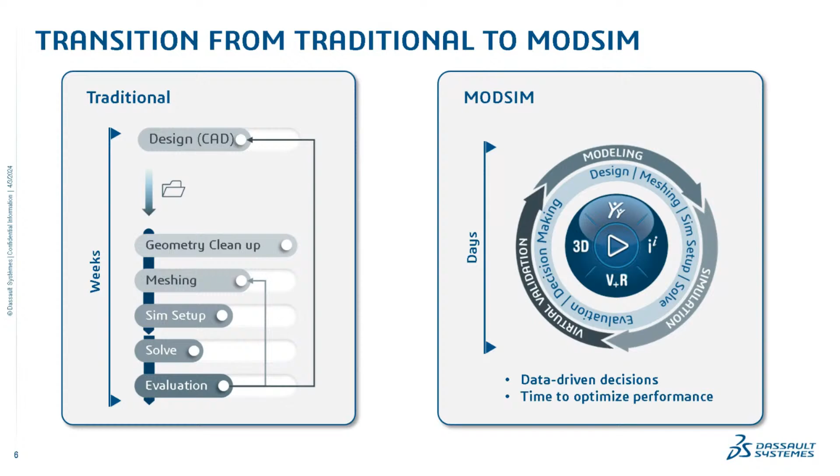With these capabilities, ModSim already offers a huge potential for time saving. Let's have a quick look at a very simple example to show you how this works in principle. The example refers to a frame of a fuselage structure. The designer has built a parametric CATIA model and a finite element mesh already exists.

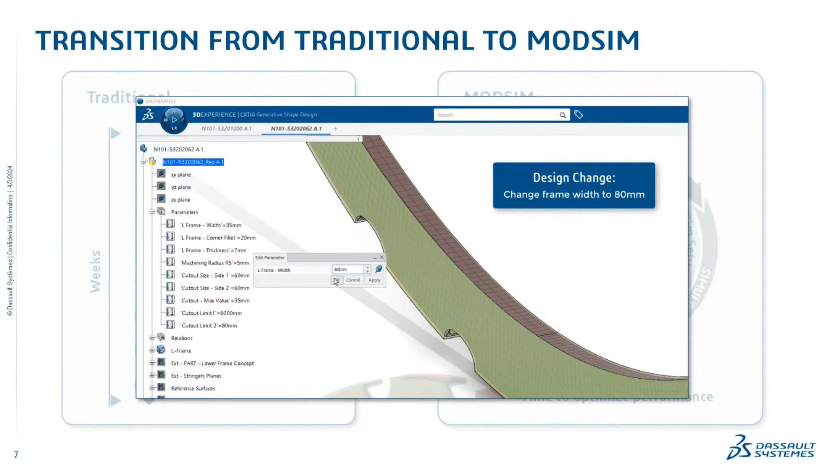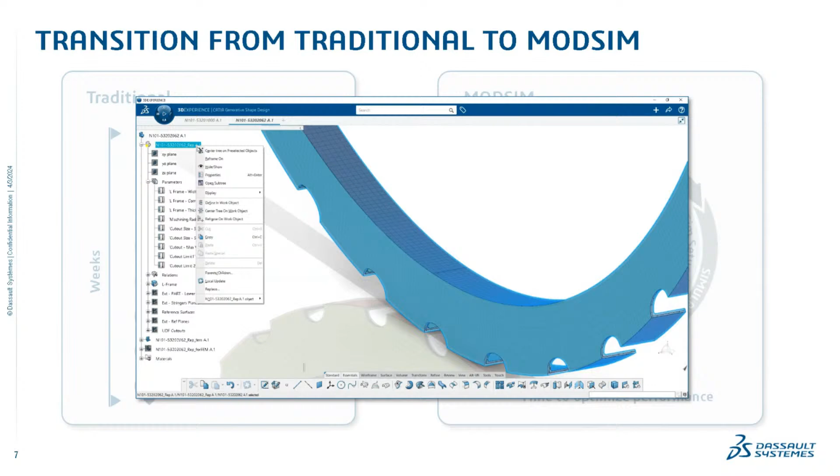Now on the design side, with the CATIA application, a design change is applied. To be more precise, the width of the flange is increased. Since the finite element model is fully associated with the CATIA model, the only thing you need to do to get the finite element model updated is push the global update button. Through such a global update, the finite element model will be automatically synchronized with the latest design data.

Of course, this is only a very simple example to show the principle. Real-world models with large, complex assemblies certainly pose a number of additional challenges. But since the focus of today's presentation is a bit different, I do not have time to talk about this aspect of ModSim in more depth.

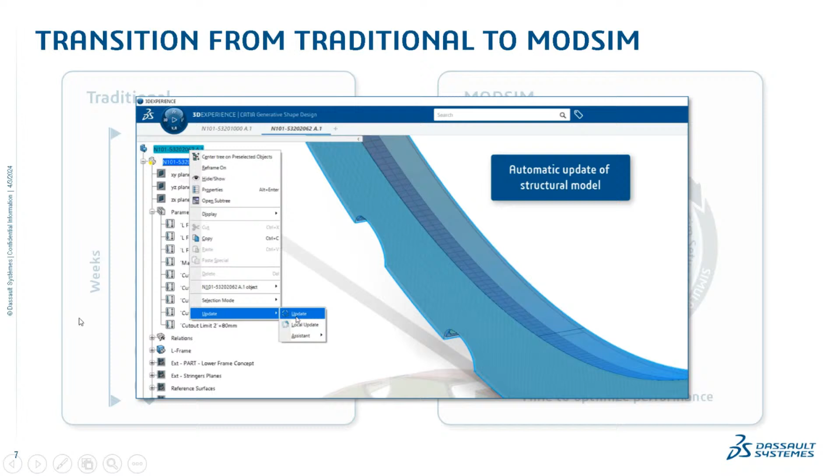However, what I would at least like to mention in this regard is that this capability to automatically synchronize simulation models with design changes is of particular interest in the context of optimization tasks or general design studies, whenever you're working on design exploration. Because we also provide a more or less complete set of both parametric and non-parametric optimization techniques on the 3D Experience platform, it is very efficient and straightforward to run such design and optimization studies based on these ModSim capabilities.

But what is more critical with regard to the topic of our presentation today are those aspects of ModSim that closely link the world of design and simulation to the entire product development process. This link is established through a number of data management processes, such as requirements management, change management, test management, and a few others.

Requirements management, for example, is important because it allows you to digitally capture those requirements coming from certification regulations. And talking about certification, usually you have to prove that an airframe structure complies with the certification requirements through test. Most of the time such tests are real physical tests, but they could also be virtual tests, meaning simulations. In any case, what is important is that the test data, whether it comes from virtual or real tests, is linked to the requirements the test is supposed to verify.

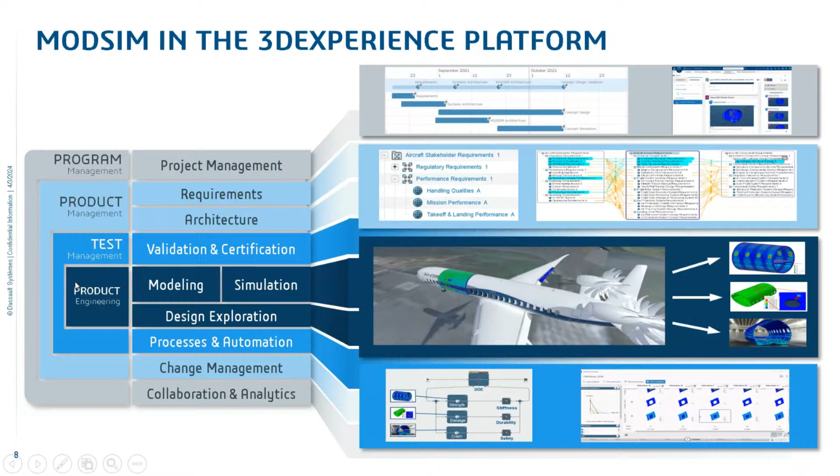This link between requirements and virtual or real test data, or in other words, the traceability from simulation data back to the certification context, can be achieved with the test management capability on the 3D Experience platform. Once we get to our example of cohesive joints, I will also show you how creating this link with test management actually looks like.

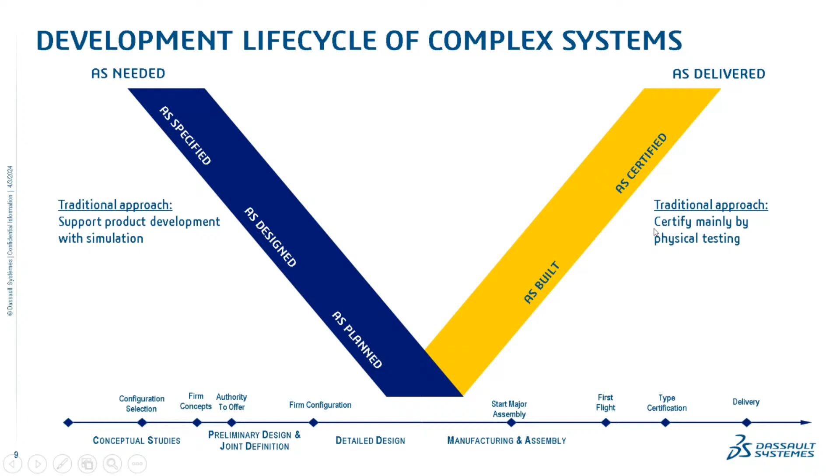In a classical development process, simulation is primarily used on the left-hand side of the V, in particular in the context of designing or optimizing the product, the aircraft for example. On the other hand, when looking at the right side of the V, the verification of certification requirements is predominantly provided through real physical tests that, of course, cause significant costs to the program. So the objective should be to increase the use of simulations and at the same time reduce the number of physical tests in the context of verifying certification requirements.

But of course, to do so, you have to build already fairly early in the program, prior to any certification activities, high confidence in both your simulation models and your simulation methodology. This means you have to work towards building simulation credibility, and you have to document how you do this.

Confidence in simulation models is achieved if you can prove at any time that the models were built with the right inputs. This requirement can be fulfilled through the close and direct link between design data and simulation models that we provide on the 3D Experience platform. I just showed a simple example of how this close link can look like, and thanks to this link, we know at any time to which design revision a certain simulation model belongs. So in this way, you can at least assure confidence in simulation models.

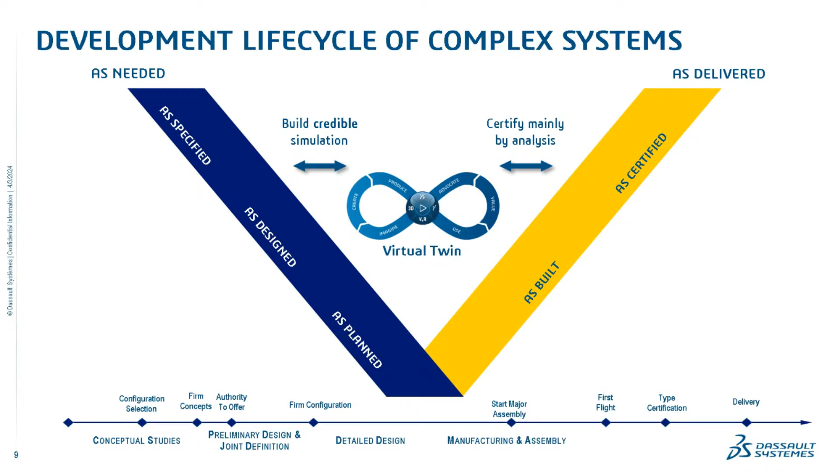Meaning what is left is still the question how we can assure that already during the design phase, the required confidence also in the accuracy of the simulation methodology is achieved. And in this context, I would like to refer to the respective standards on verification and validation that are issued by the ASME, the American Society of Mechanical Engineers. And by the way, also the EASA, the European Union Aviation Safety Agency, has issued fairly recently in 2020 a memorandum with very similar content that summarizes requirements for assuring simulation credibility.

So in particular, the ASME standard V&V 10 requires that, based on the well-known analysis and test pyramid in the aerospace industry, a systematic comparison of test and simulation results is carried out. So on the lowest level of the pyramid, on the coupon level, this comparison is typically used for calibrating material properties. And then on the higher levels, successively more complex structural components are analyzed to assure that also other model parameters, for example, the mesh refinement or the applied solution procedure, are chosen in a suitable manner.

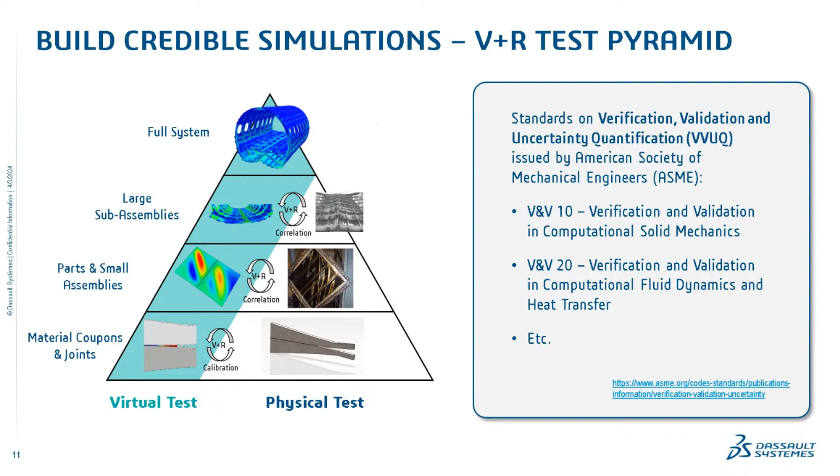And if in this way you've finally demonstrated that the chosen approach for modeling and simulation is an accurate representation of the real world problem you're dealing with, then authorities may accept that the final proof of compliance with the certification requirements is based on simulation. So if you want to follow these V&V standards, the first step for you is to define a test strategy that is appropriate for the real world problem at hand, and that covers both all real physical tests and all virtual tests or simulations.

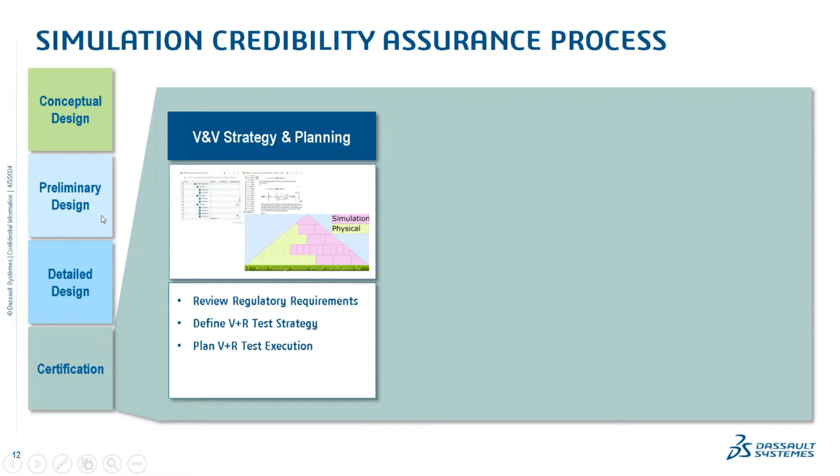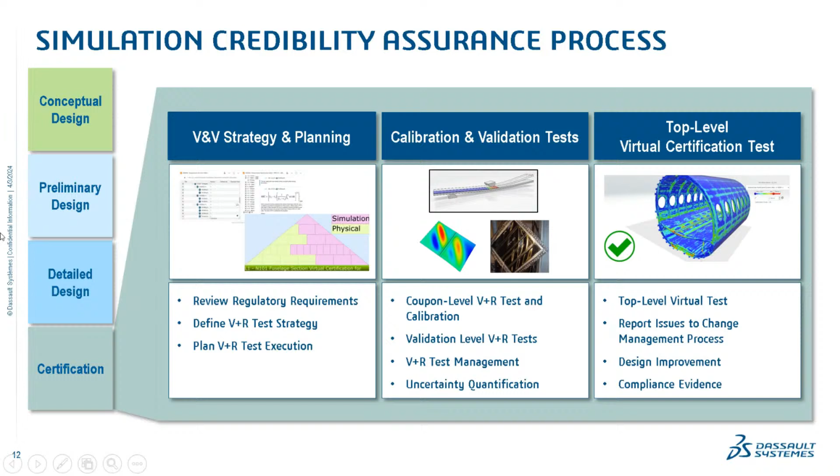Then in the second step, you have to validate the simulation methodology. This means you have to conduct the respective calibration and validation tests on the lower levels of the pyramid. And the final step consists of the top level certification test that may be conducted virtually with simulations, thanks to the validation activities that have been done at the lower levels. Okay, that's basically all I wanted to share about this general framework for model-based certification.

Let's now move on and spend the remaining time of this presentation on the example that we've promised to talk about in the title of our presentation, which is cohesive joints. So for time reasons, we will not be able to talk about the entire process that I introduced on the previous slide, but we will definitely guide you through the main aspects of the first two steps. So defining a test strategy and then subsequently running calibration and validation tests. Let's start with the first step and see how you can digitally capture certification specifications on the 3DEXPERIENCE platform by using requirements management, and then create links to such requirements when defining an appropriate test strategy.

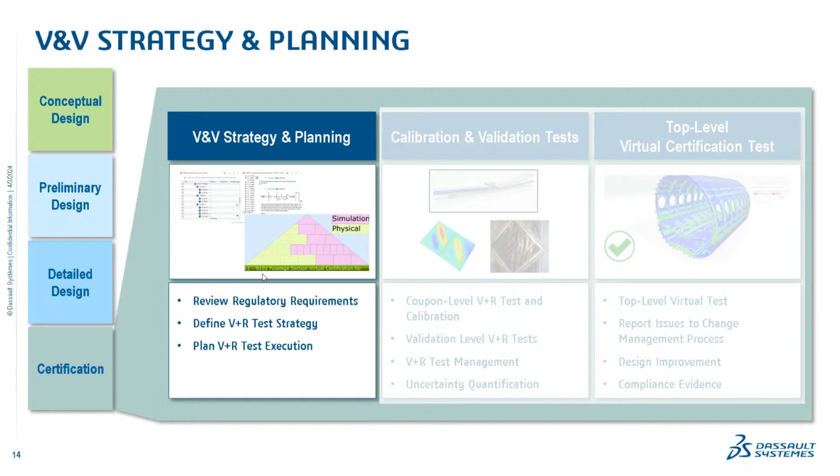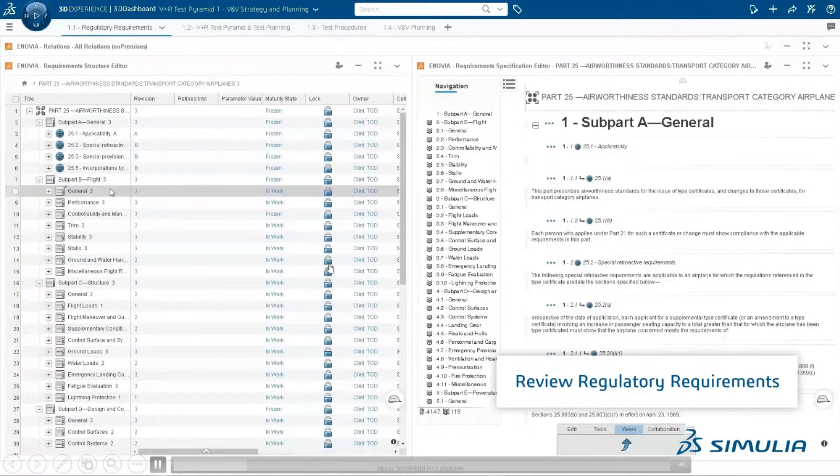So on our internal 3DEXPERIENCE server, we have digitized the entire CS-25 regulation of the EASA, which is the certification specification for large aeroplanes. Practically speaking, this means that for every requirement from the regulation, we have created a PLM object on the platform that, for instance, can be linked to any simulation that is used for verifying the requirement. Another advantage is that treating such requirements as PLM objects means that you can assign them PLM attributes such as version number or maturity state.

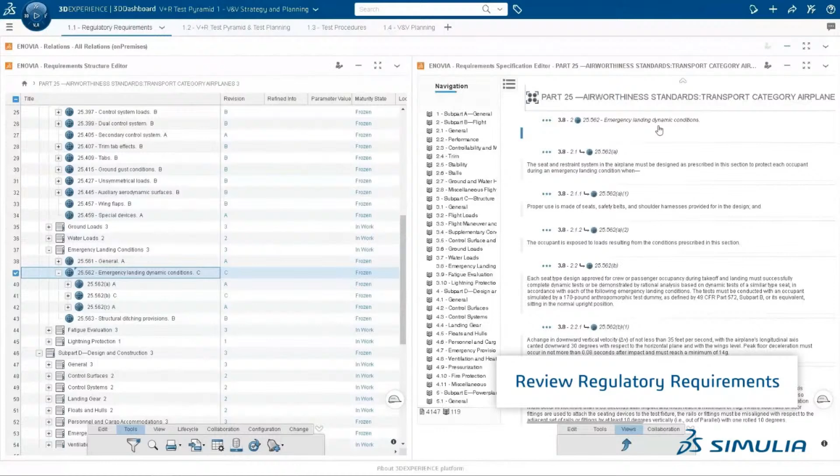The bigger certification context that we want to use to look at our example of cohesive joints, these are the requirements on structural integrity of the airframe in case of an emergency landing. These are the requirements that you see on the screen right now. So they are documented in section 25.562 of CS-25. Okay, let me pause the video for a second because I want to make a few more remarks before we get into the test management.

Yeah, as I said, the top level certification test that we are interested in for our example is a barrel drop test of a fuselage section that represents the emergency landing scenario. And assuming that we have to deal with a composite structure, there are a number of different failure modes that need to be taken into account, because each of these failure modes has a strong influence on the energy absorption in such a crash scenario. And one of these failure modes, and that's actually the one that we want to focus on today, is progressive damage of the cohesive interface layer between skin and stiffeners.

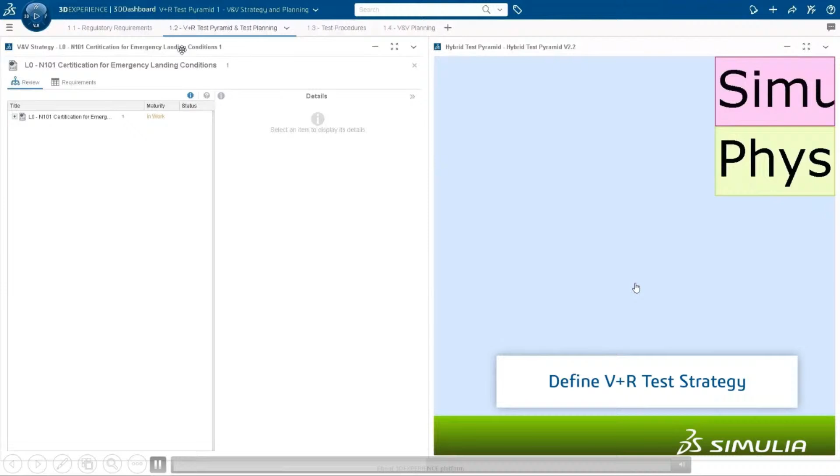So for this example of a barrel drop test, and with particular focus on the failure of cohesive joints, we have now used the test management application on the 3DEXPERIENCE platform. That's what you see in the video right now, to define and capture a test strategy based on a pyramid of virtual and real tests.

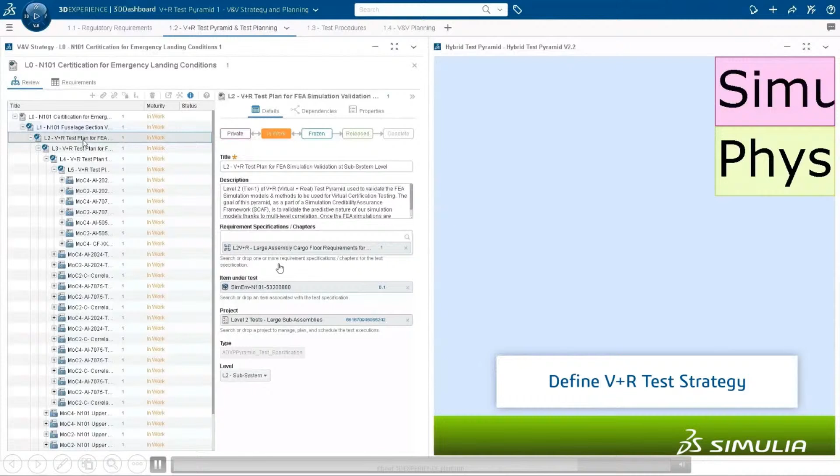So here it's important to note that as part of the test specification, that's what you see here, a link to the respective requirement object is made. And so now for our specific example, when defining the test strategy, we have to consider that there are a number of different levels. Of course, we have the drop test itself. This is defined at level L1, but then we also go down to level L5, which captures all coupon level tests.

These coupon level tests are basically needed for characterizing material properties. And of course, each level can also contain several tests, either virtual ones or real ones. And all of these tests that are defined as part of the strategy are represented by so-called test objects. So these are these individual items that you see in the tree here on the left-hand side of the test management application.

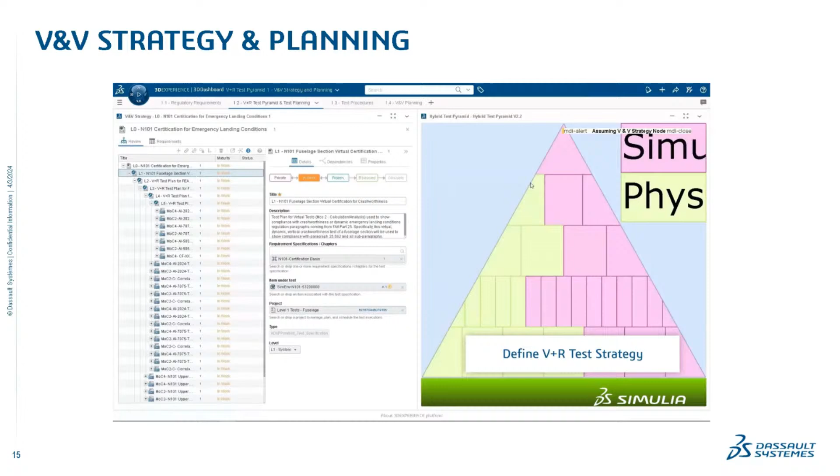And it's actually these test case objects which are linked to both the requirements and the simulation data from the virtual tests. So in this way, it is finally the test management application that ensures traceability from certification requirements to all related simulation data. Yes, so that's what I wanted to show you with respect to planning all of the tests, defining the respective test strategy. And now the next step would be to get a bit more into detail and look at the actual execution of calibration and validation tests.

And at this point, I would like to hand the presentation over to my colleague Gerhard. At this point, I will also stop my screen sharing so that Gerhard can take over and has the full control on his own screen. So Gerhard. Okay, so I hope you can hear me well and see my screen now. No, we can hear you, but I think we cannot yet see your screen. We can't see the screen. Okay, yeah. Now I see it. You can see? Yeah, okay. We can see.

Okay, so right after talking about the V&V strategy and planning, we will now switch gears a little bit and focus on calibration and validation tests. So at the coupon level, which is the bottommost level of our test pyramid, both physical and virtual tests are performed side by side. The test manager role on the 3DEXPERIENCE platform contains apps allowing to link the necessary requirements and the items under test, to describe all required steps for the physical test to be performed in the lab in a test script, and also eventually to gather the results of the experiment.

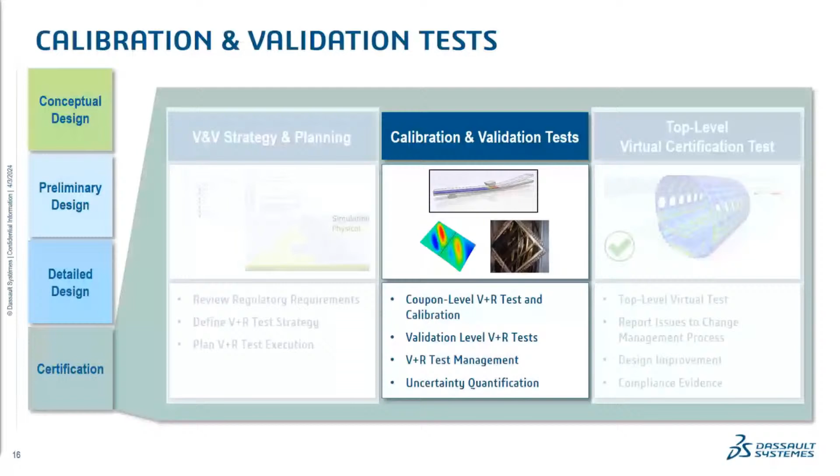The goal of the virtual tests at the coupon level is to calibrate the virtual material models that represent the coupon. So based on the physical or experimental results from the lab test, we are able to launch a calibration procedure aiming to accurately replicate the physical behavior of the coupon with our finite element model. And similar to a hardware lab test, any virtual test may also be planned and managed via the test manager role, and the finite element model of the coupon can be attached directly for further use here by the material calibration expert, for instance.

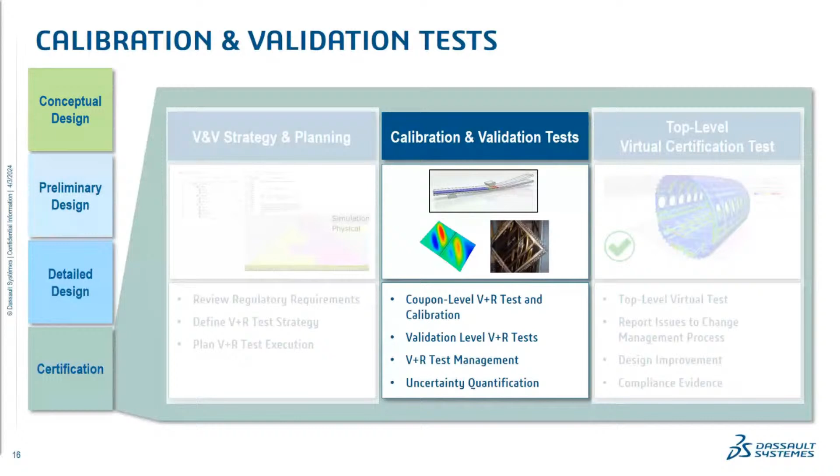At the validation level, which is level 1 of our test pyramid, the calibrated material models from level 0 can then be reused to virtually simulate parts or small assemblies and correlate these against corresponding hardware physical tests. Now let's dive a little more into detail and talk about the tasks at the coupon level first.

So what we see on the right-hand side, typical finite element models which may be used at the coupon level. These can, for instance, be dog-bone specimens for replicating tensile tests, such as the one shown in the upper right figure. And such tests are very well suited for calibrating elastic plastic material behavior for metals, for instance. At the bottom right-hand side, we see a double cantilever beam model, which can be used to calibrate the traction separation behavior of adhesive materials.

The picture on the left shows a glimpse of the SIMULIA material calibration app on the 3DEXPERIENCE platform. This app is particularly well suited for performing different material calibration tasks required at the coupon level. So as we can see in the red box, a broad range of Abaqus material models are supported for calibration, not only different types of elastic plastic or hyperelastic models, but also more sophisticated models like the parallel rheological framework model, the two-layer viscoplasticity, nitinol, or even user-defined material models. And for adhesive materials, the app supports cohesive traction separation behavior.

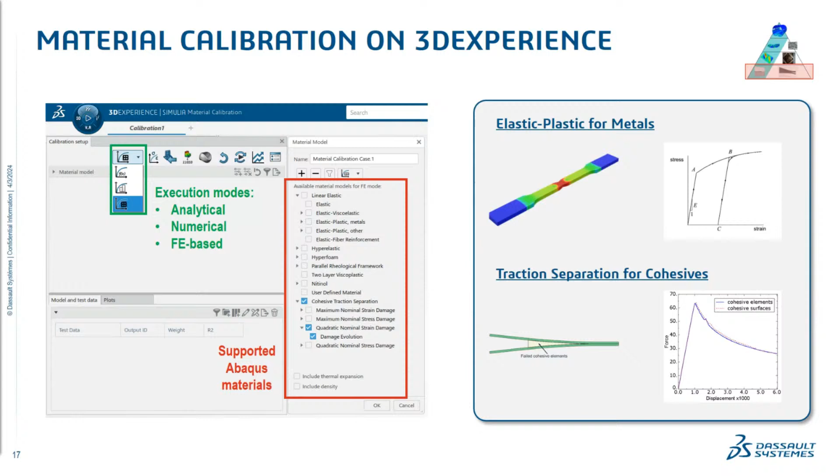Since test data are not always nice and smooth and calibration against such data might be difficult, the app also offers a set of tools to edit, to repair, to regularize, decimate, or smooth the imported test data. Second, we need to select a suitable material model like elastic plastic or hyperelastic or hyperfoam, etc., or as in our case, cohesive traction separation. The list of the supported material models was shown on the previous page, and this list is also getting longer and longer with every release of the material calibration app.

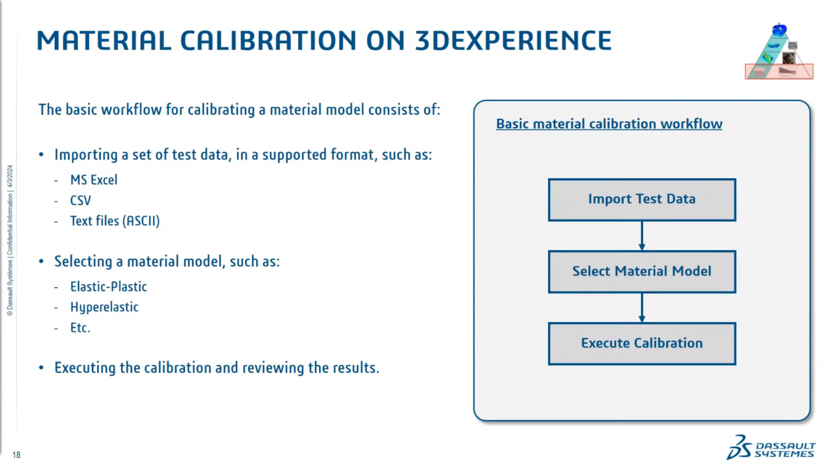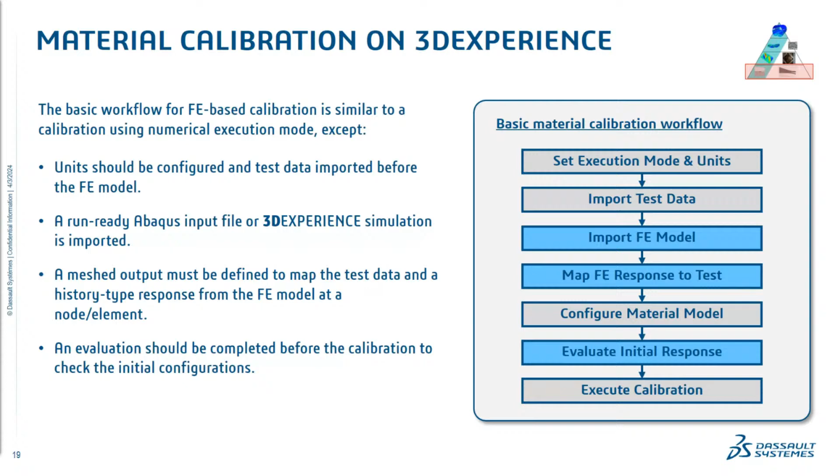So as an example of a coupon level task, we will now focus on the calibration of our adhesive material behavior. In Abaqus, adhesive materials can be modeled either via a surface-based cohesive behavior included in a contact definition, or by means of cohesive elements with traction separation material behavior. And as we have already seen in one of the previous pages, the material calibration app supports the calibration of traction separation cohesive behavior. So in what follows, we will mesh the adhesive material with a single layer of cohesive elements and assign cohesive traction separation material behavior to these elements.

For both deformation modes, for the normal mode and for the shear mode, the material properties to characterize traction separation type cohesive behavior are the elastic stiffness, a certain damage initiation stress or strain, and also the critical fracture energy. And furthermore, a certain mode mix law has to be selected, which quantifies the relative proportions of normal and shear deformation in the cohesive zone. Different types of mixed mode behavior are available, either energy-based or traction-based.

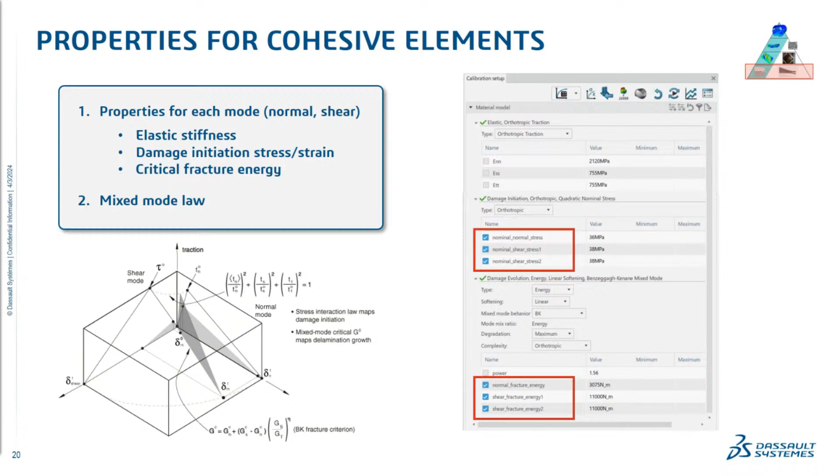If the elastic stiffness is already known, for instance, from the adhesive manufacturer, then the user can enter these known values and deselect the elastic stiffness for the calibration procedure so that the optimization algorithm will not be able to change the known stiffness values. As we see here in the upper part of the dialog, the elastic stiffness values do not have the blue checkmark box activated, so the calibration procedure will not change the user specified values here.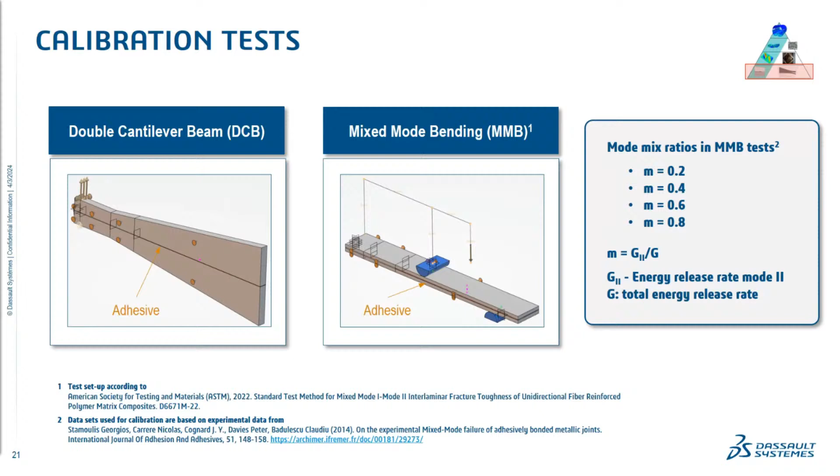The mixed mode bending model on the right hand side is used for determining the mixed mode 1 and mode 2 fracture toughness, and depending on the length of the lever arm for the force, different mode mix ratios can be investigated using this model. Remember that the mode mix ratio is defined as the energy release rate of mode 2 over the total energy release rate. Now let's watch a short video demonstrating such a calibration exercise.

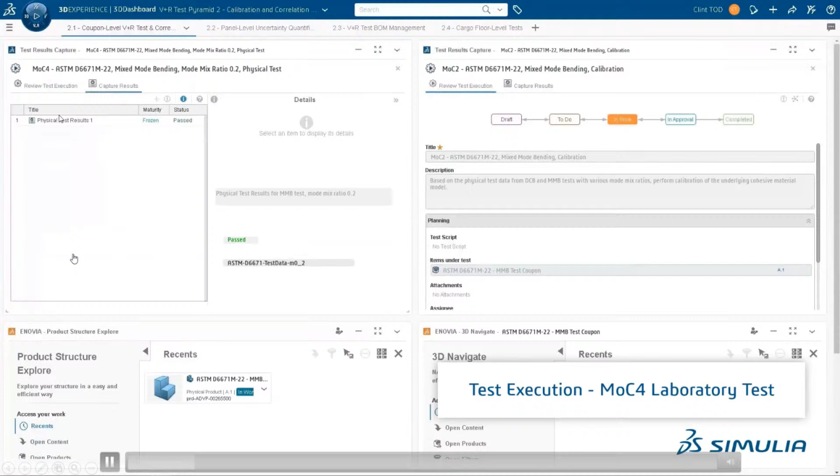The video starts by showing that an MOC4 laboratory test has been completed. It's a mixed mode bending test with a certain mode mix ratio of 0.2. The item under test is a mixed mode bending test coupon, and all the required test steps are documented in detail in the test script. The physical test results have then been attached via the test results capture app of the test manager role, and the status of this test is set to passed.

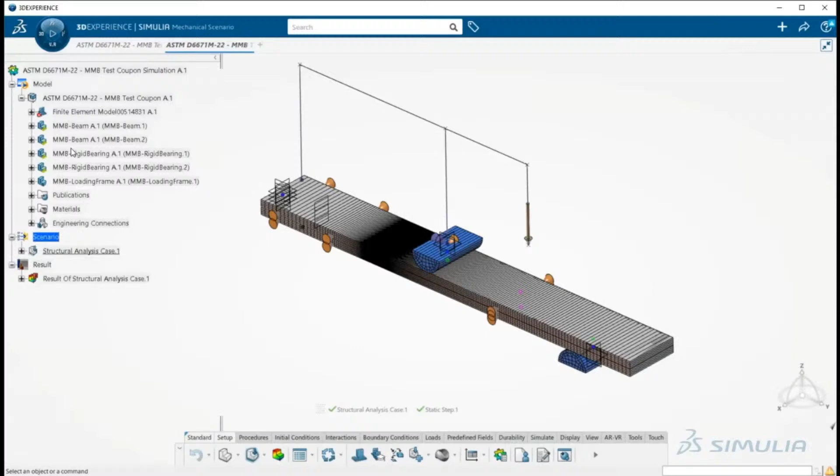The next step is the execution of an MOC2 test, which is a simulation, and in our case, it is the calibration of adhesive material properties based on a mixed mode bending test. The mixed mode bending simulation model is now opened here in the SIMULIA mechanical scenario app. I'll pause the video for a second. The layer of cohesive elements is placed between the two plates. The mesh in the region of the crack tip is properly defined here, and rigid cylinders and a frame structure of a model with connector elements are used to apply the mixed mode loading in a structural analysis case.

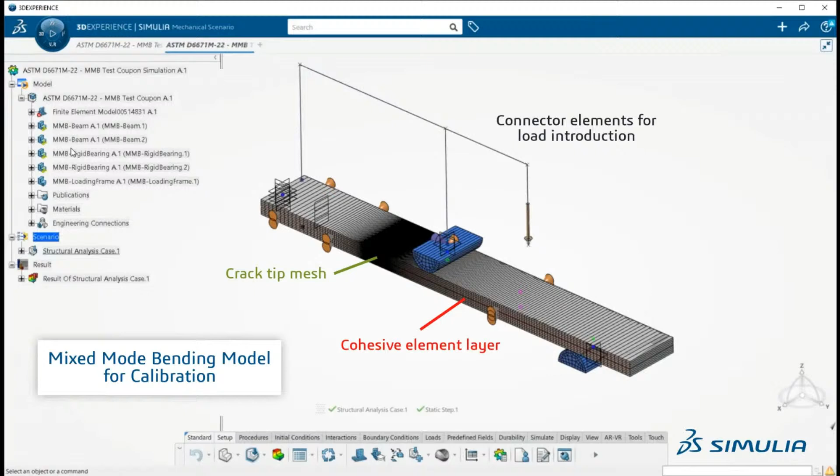So as you can see here, the model has been run with some preliminary cohesive material properties, and it is capable of reproducing a behavior similar to the hardware experiment. And now the material calibration engineer can go ahead and use this model as a starting point, combine it with experimental results from our MOC4 test, and set up a calibration procedure for determining the cohesive material properties. And the main steps of such a calibration are shown next.

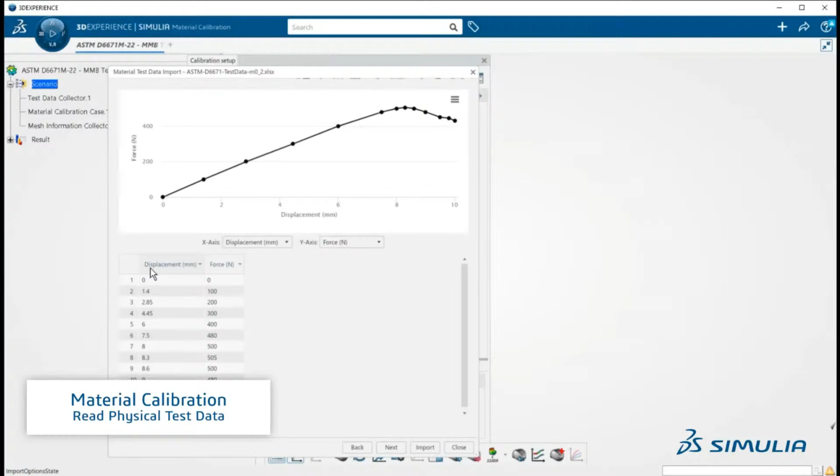So first, FE-based calibration mode is selected since we want to use the previously shown finite element model for the calibration. Then the experimental data are imported into the material calibration app as force versus displacement data in our case, obtained from the performed MOC4 test. Then the FE simulation model used for the calibration has to be selected, together with the material to be calibrated, which is one of the materials available in this simulation model, the adhesive here. Next, the cohesive traction separation model is selected, and some damage initiation and damage evolution options are chosen here.

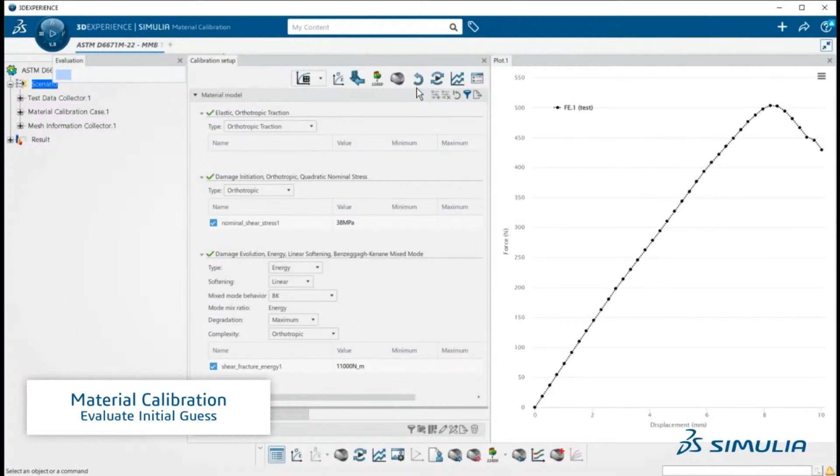And then before running the full calibration, it's always good advice to perform a single run evaluation on the initial guess parameters. And if this initial solution is then in the right ballpark, then we can go ahead and launch the full calibration run.

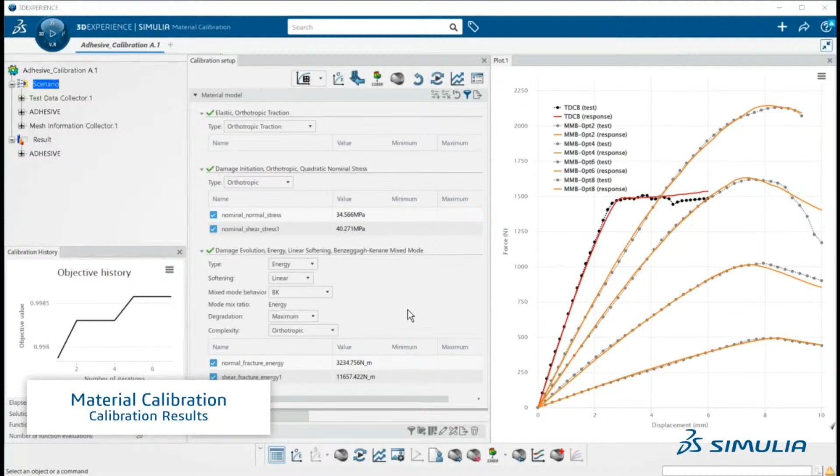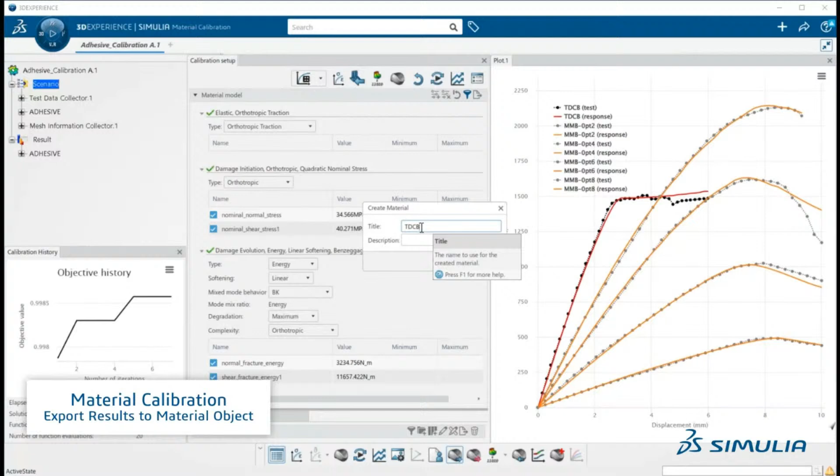In this case, it's eventually not only one single finite element model which was used for calibration, but several different ones. A double cantilever beam model for calibrating the pure mode 1 related parameters, and several mixed mode bending models with different mode mix ratios. And once the calibration is completed, then we can export the calibration results to a 3D Experience material object, which then can be reused for other simulation and validation models.

So this latter process is also summarized on this page here. First, on the left here, we capture the calibration result in a material object on 3D Experience. And for this, the material calibration app offers the option to create a material once the calibration procedure is completed and the user is satisfied with calibration results, which means that the simulation model produces a response sufficiently close to the experimental data.

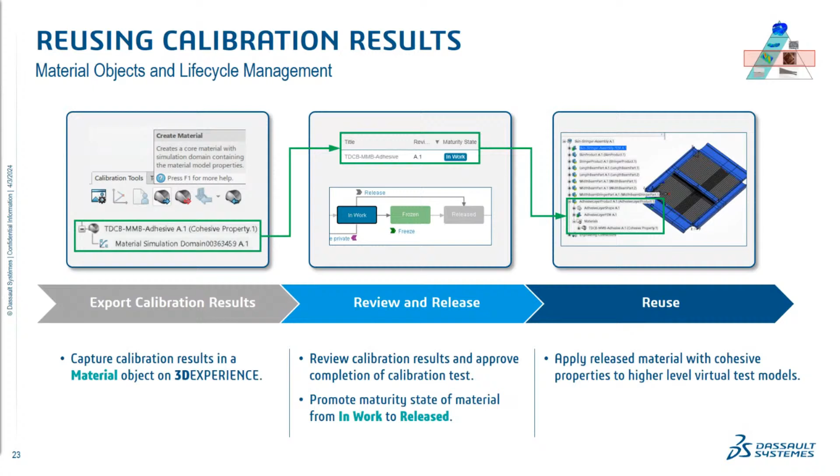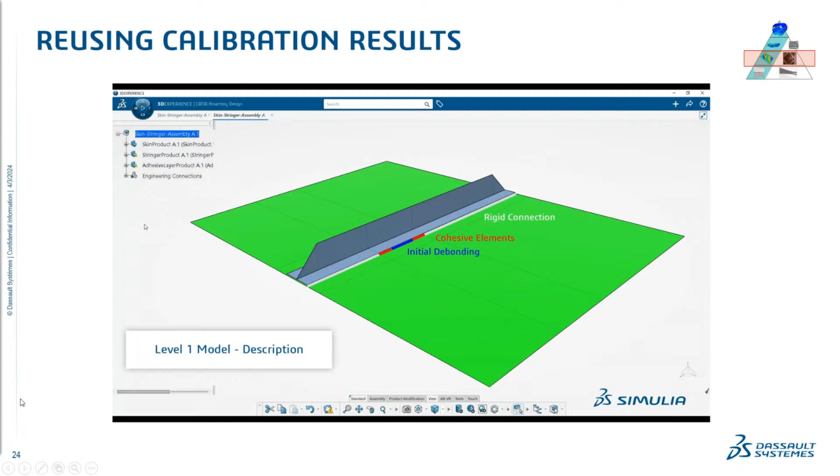Finally, now let's watch in a little video how the calibrated cohesive material model is then reused in a level 1 model or a validation level model. And the level 1 model under consideration here is a skin stringer assembly. Both the green-colored skin and the gray-colored stringer are composite parts.

A rigid connection between these two parts is in place at both outer ends of the stringer, highlighted in white here. In the center, an initially debonded blue region is flanked by two regions of cohesive elements, and the initially debonded region can expand into these red areas as cohesive elements fail due to the applied loading.

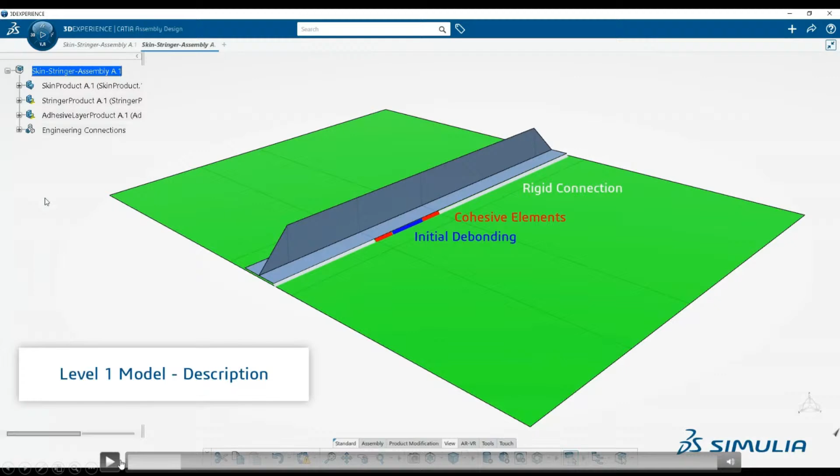The video then shows how a composite layup is created with a certain stacking sequence of layers shown currently. And this layup is then assigned to the skin part by defining a composite shell section, as we see here, which connects the skin geometry and the defined layup. And a similar procedure is also required for the composite stringer. For the stringer, the flange and the web can potentially have different composite layups.

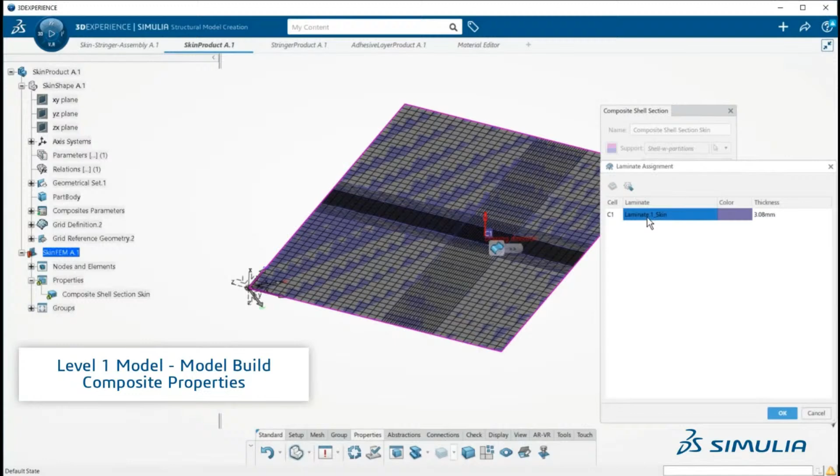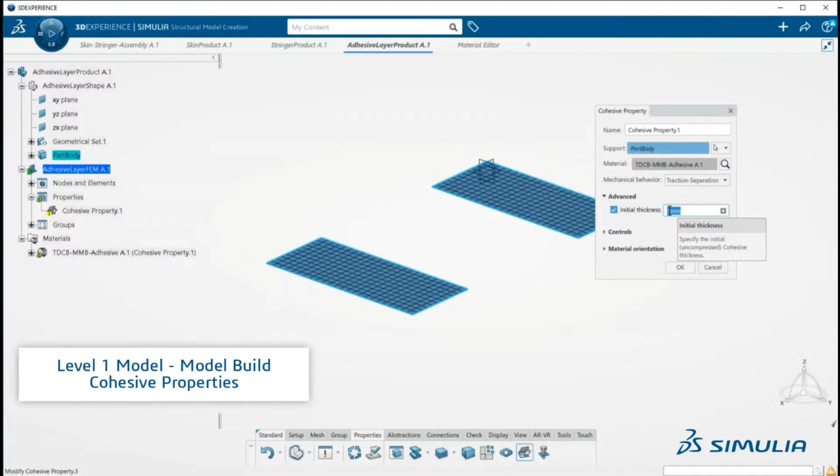As a next step, the cohesive property is defined for the two patches of cohesive elements, which you see here. Cohesive material created in the previous calibration exercise can now be reused and assigned to these cohesive elements. And then a cohesive property requires some additional parameters which are specified now in the video.

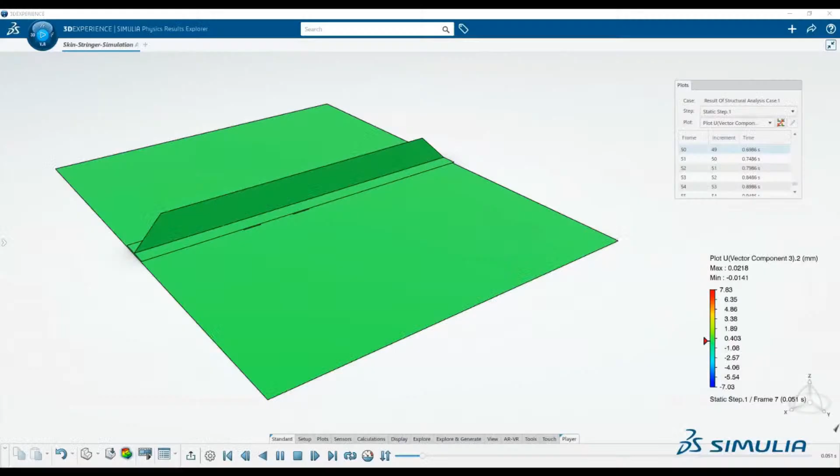The simulation results first show here an animation of the out-of-plane displacements increasing with increasing load level, and a similar buckling pattern is also observed in our hardware experiment. And finally, we observed that the damage and failure of the cohesive elements take place starting from the initially debonded region in the center of the skin stringer connection and expanding outwards, as we see here in the video.

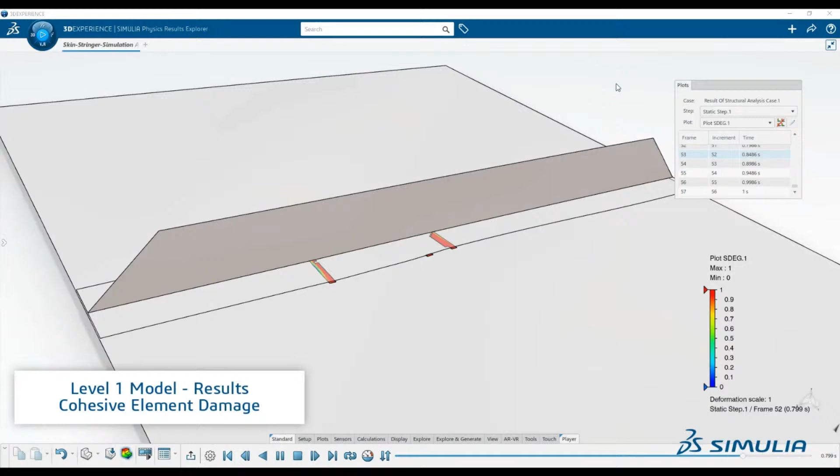So this brings me to the conclusions. In the presentation, we showed how the SIMULIA material calibration app on the 3D Experience platform allows to calibrate advanced nonlinear Abaqus material models for cohesive joints. However, also a broad range of other material models not discussed here can be calibrated, from elastic plastic models to hyperelasticity to even user materials.

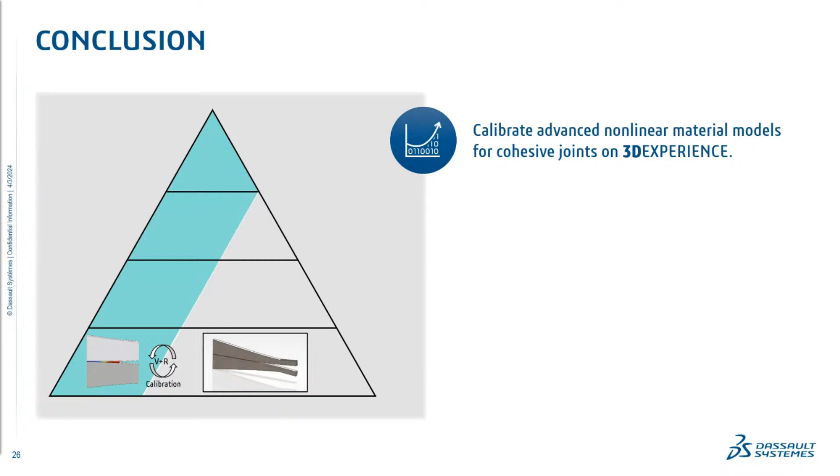And at the coupon level of our test pyramid, this app can be very helpful for material calibration engineers to create material models for finite element simulation based on experimental test data. Furthermore, the 3D Experience platform enables the users to manage the life cycle and the maturity state of material properties, and it ensures full traceability all the way from the calibration source data of the hardware experiment to the final material model properties.

Calibrated material models can then be reused with confidence in the validation level simulation models of the test pyramid in order to correlate simulations of parts or small assemblies to corresponding hardware tests. For this, we have presented a small skin stringer assembly as a level 1 validation model, where the traction separation cohesive material from level 0 calibration was reused.

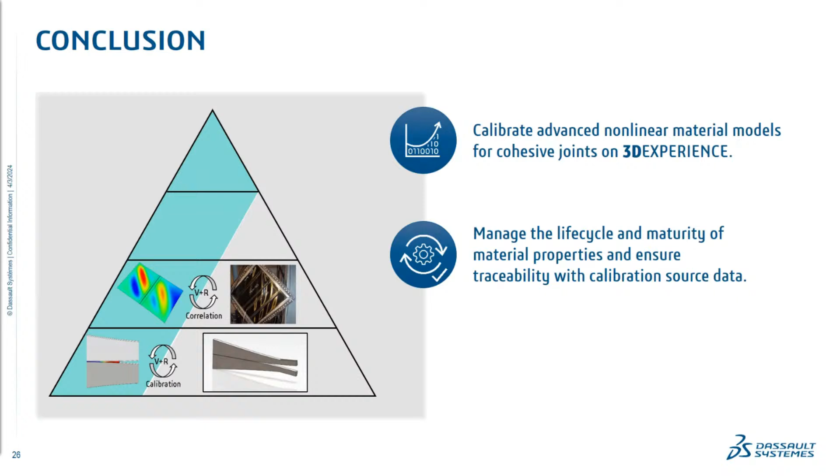And finally, the test manager role on 3D Experience allows to define and manage a virtual plus real test strategy in order to support a model-based certification approach built on material calibration and the correlation of simulation models and hardware experiments at several levels of the test pyramid.